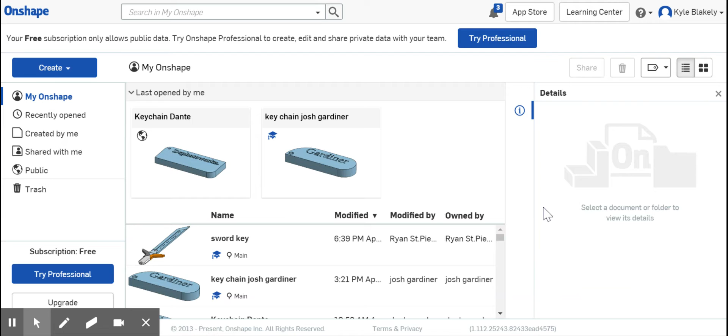This week's distance learning challenge is to make a design for a grad ring. Every year, normally for grade 12s, I make grad rings on the CNC mill at school. I may use the CNC mill I have at home to try and do the same thing if we can come up with a design that is realistic to make.

The focus of your design ideally is to make it out of round stock or round material. The reason for that is it'll be a lot faster for me to make because my CNC lathe will be able to produce much quicker. This isn't necessarily going to be super detailed, just something that looks nice. It'll have SFX engraved in one spot and maybe the year engraved in the other.

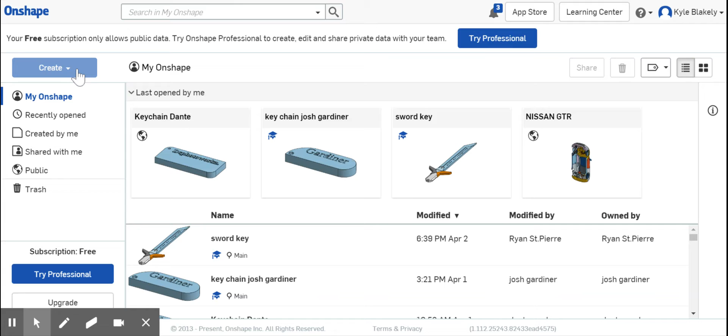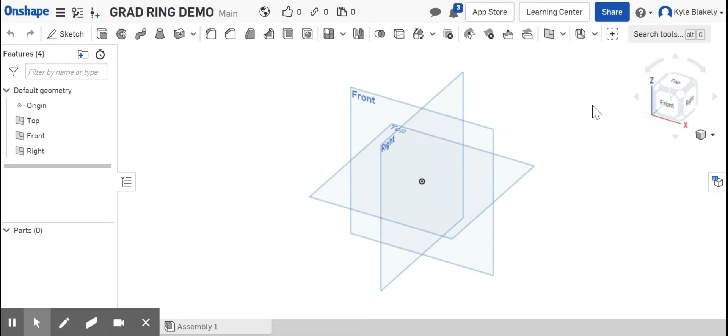Anyways, so we're going to create a new document. Call it grad ring demo. I'm going to draw this ring in the top view. Over in this view cube, I'm just going to click on top, then sketch, and click on the top view. Now we've got that set up.

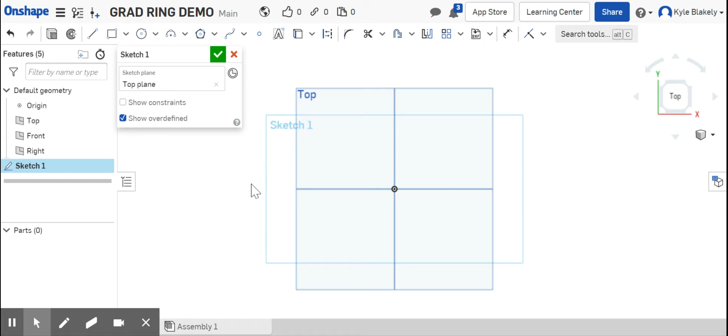I'm going to come over here. You can use the drop down, or you can also use shortcut keys. If I type C for circle, I could snap to the middle. I know the material I'd likely be using to start making the rings with is 1 inch in diameter. If I tap enter or click once, the box comes up, and I can type in 1.

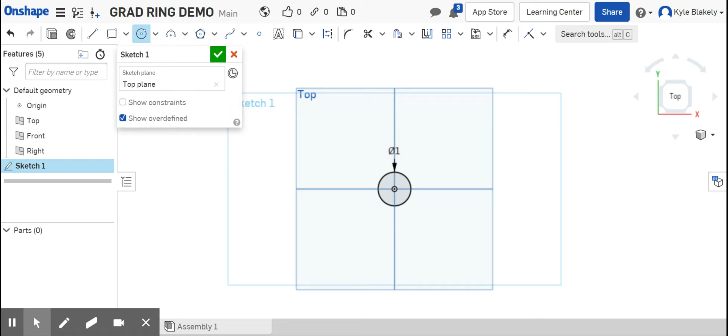If you guys want to work in millimeters, you can come up to the bar, workspace units, and change from inch to millimeter. Maybe I'll do that for a little bit, we'll switch back and forth. It doesn't really matter to me too much.

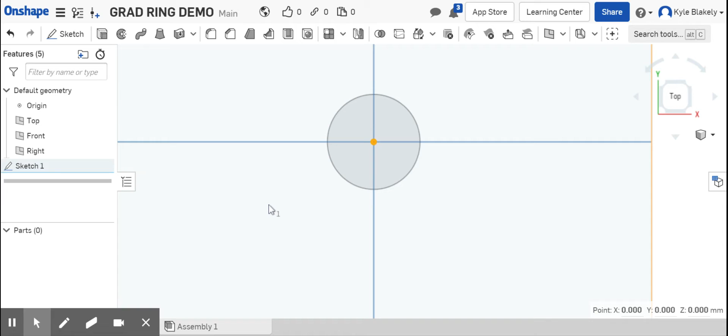So if I hit C for circle again... oh, I can't do that. I have to go to edit, because I changed the units, I have to turn the sketch on. So 25.4 millimeters is 1 inch. C for circle, click, and then I'm going to type in 20 millimeters.

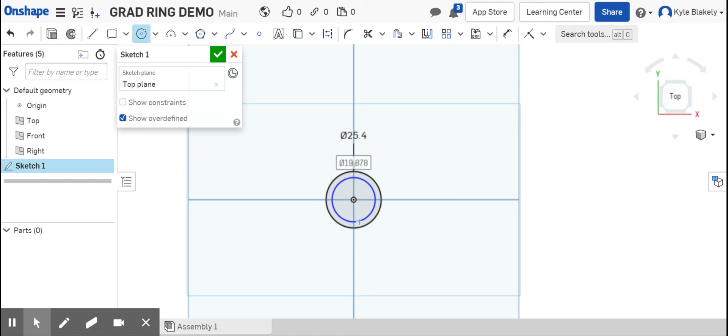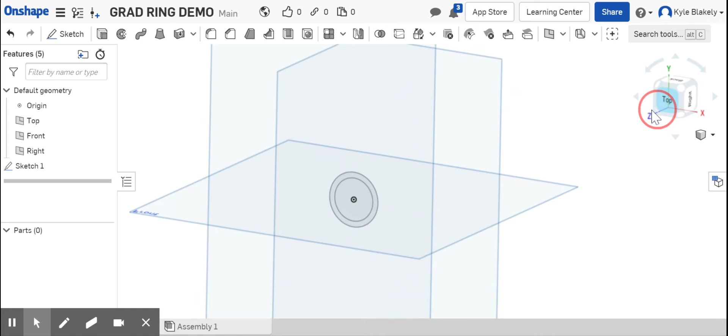That's just a basic ring size that a grade 12 student thought their finger would fit. I may be able to shrink the outside diameter, but for now we'll just try something like that. And the sketch is turned off.

So up here we've got the extrude button. We're going to click. We're not going to extrude 25 millimeters though, that would be a pretty wide ring. So 12.5 millimeters is a half an inch, still pretty big. So maybe we'll start with an 8 millimeter wide ring.

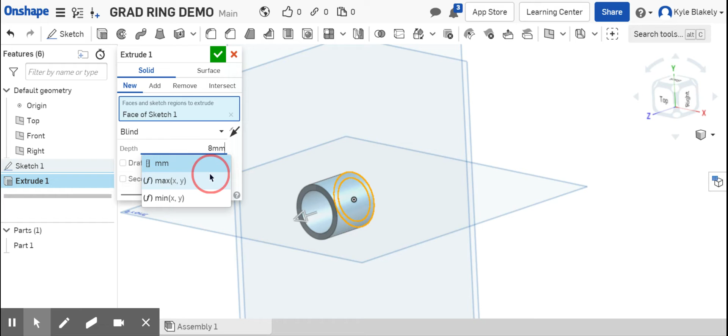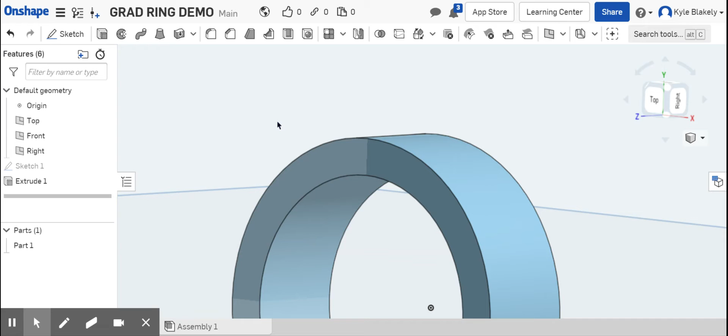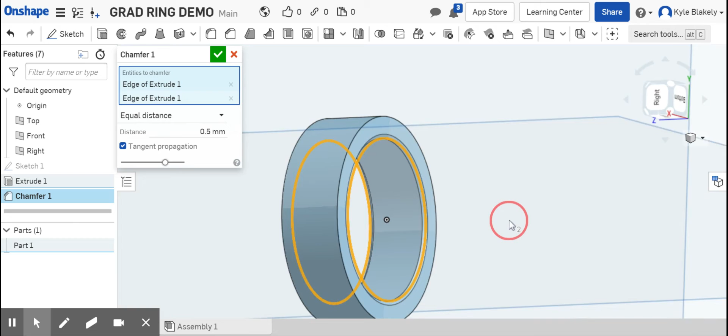We can click OK. Rings usually have a fairly sharp edge on the inside, but we don't really want that if we can avoid it, we don't want anything that'll cut your hand. So what we can do is use this button called chamfer, and change the distance to 0.5 to make a tiny little chamfer. Click there, and click there.

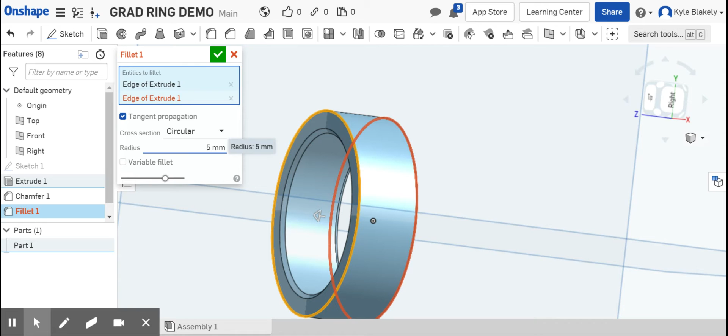And if I zoom around to the other side, I can click OK. Now for the top, we're going to use something that looks a little nicer, we're going to use a fillet. Click, click, and it's already erroring out. It's saying you can't make it 5 millimeters, but what if we make it 1 millimeter? So it accepts that, so let's go 2 millimeters. Now we have something that looks half decent, super basic, clean, neat, and tidy.

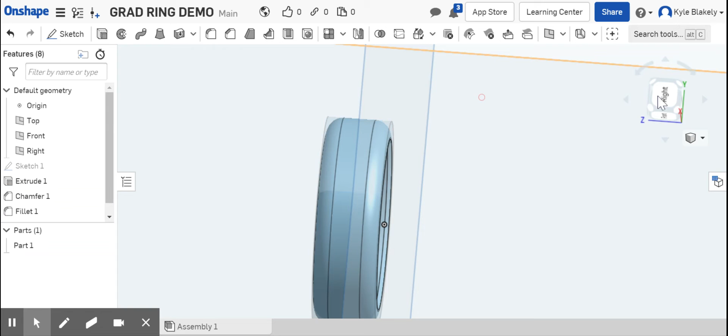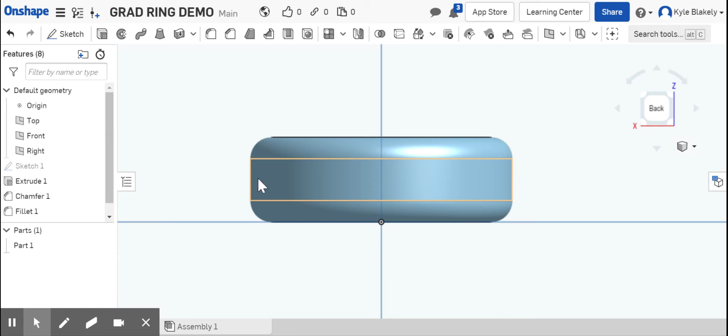And then ideally, if we go back to our top view, actually I guess we'd have to work in the back view. Now the next challenge, this is where it gets difficult, is for my machine to engrave the ring, I have to hold it in this orientation. And then we'll have to have letters sketched inside of that center band so that we could draw SHSM on one side and then flip it over.

Obviously, if you're a grade 11 student in this class, you could make one and design it so that it says 2021. Side note, if you're a SHSM student and you want to add SHSM on the side, you could do that as well, because I'll add that on for SHSM students.

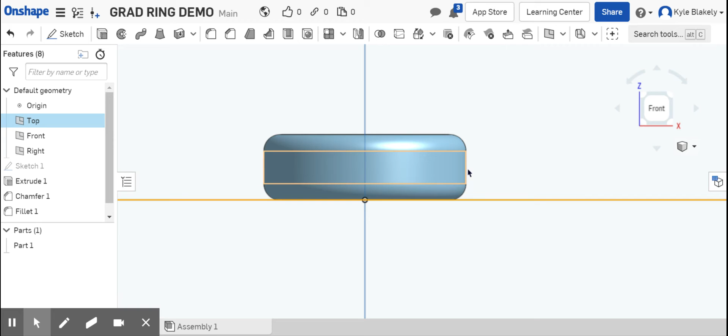So give this a try, guys. I'm not going to show you how to engrave, let's see what you can come up with. It's a super basic ring. You may have to, just as a trick, let me go back to top view.

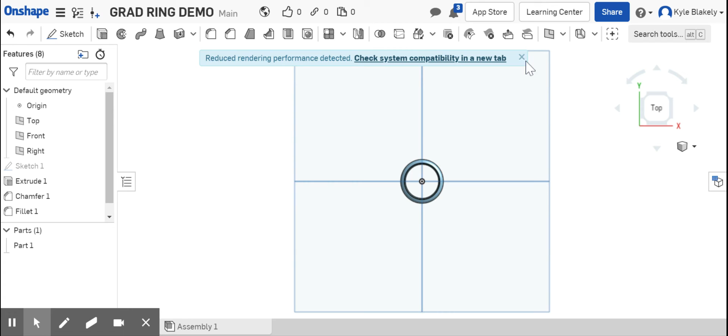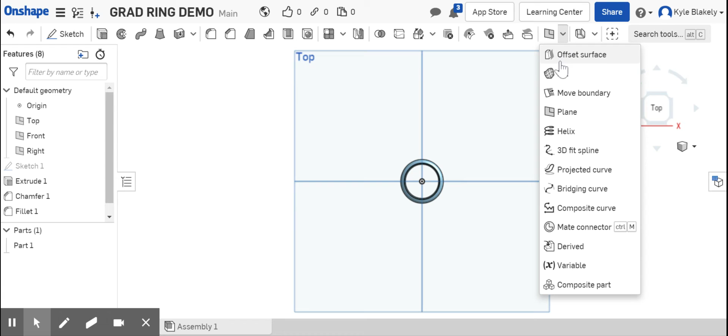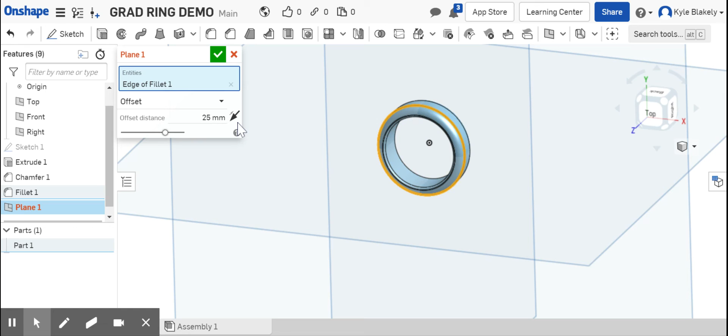You may have to use an offset plane. Modify, fillet, and I have to figure out where that is. Plane. Hopefully there's one that says 'at tangent' because we have to put it up against the circle. Fill, boundary, plane, helix. I don't know if it'll let me, but we have to try and click. We may have to try that again.

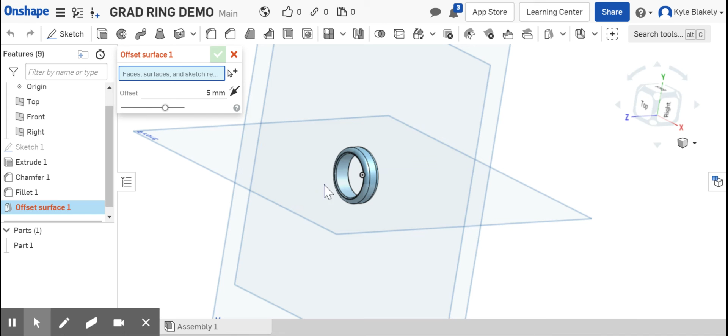So we're going to go... where's my plane button? Offset plane, it may not let us click. So let's try clicking on a flat surface right there. And then now we have, see how it offset out on that side. And if you grab this arrow, you can drag it out.

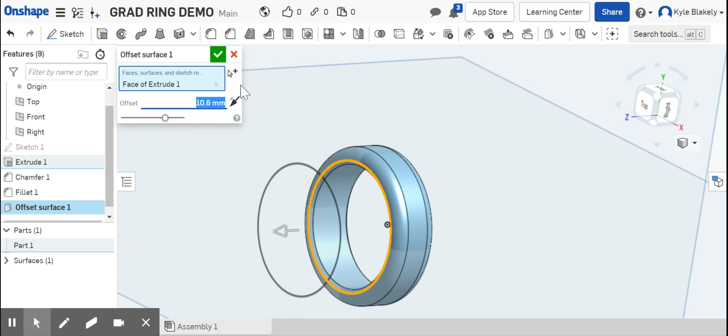The challenge with this is we want to create an offset plane that is across the outside of the ring so that we can use that for sketches. So I may set that up as a second YouTube video because it'll take me a little bit of time to get it so that it works well. But the goal is to put SFX on one side and 2020 on the other side.